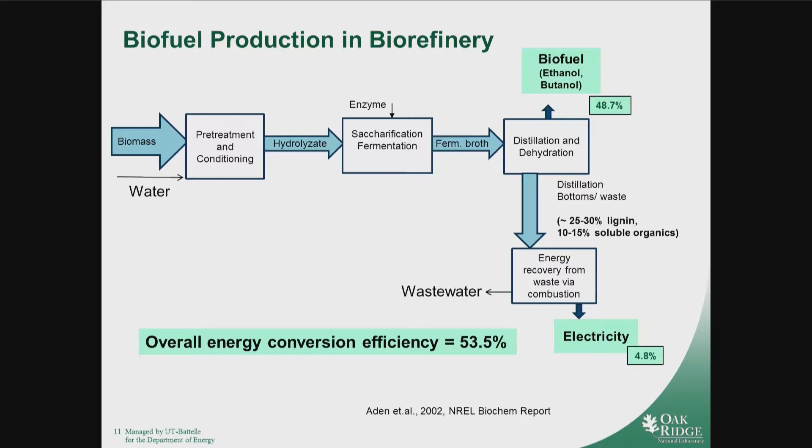So going a little bit deeper into this process in this diagram, which is a little busy, I would like to point your attention to, in addition to the energy efficiency, which results in losses of about 46%, there are also losses of water in this process, primarily due to use of evaporation, boiler technologies, and so on, which result in evaporation and other means of loss of water, which can amount to about 95%.

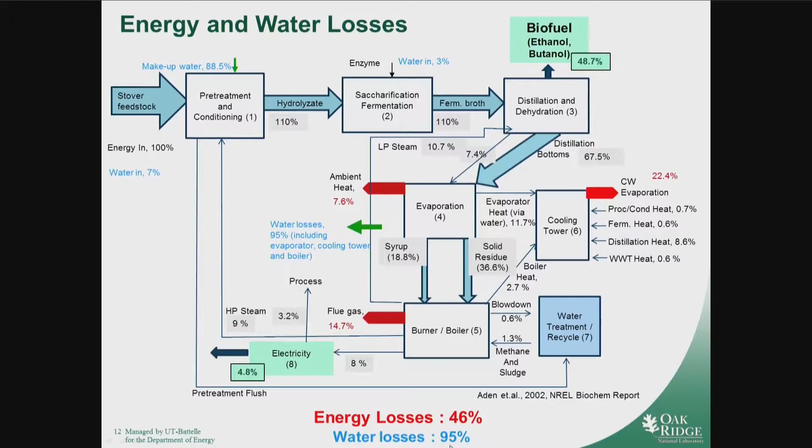So in addition to the losses that I pointed out in this slide, the composition of the wastewater that is generated in the biorefinery is also pretty complex, and it has some components which are inhibitory to the overall process if you have to consider water recycle. During the biorefinery conversion process, in the pretreatment step, the processing of biomass results in production of some molecules such as furfural, hydroxymethyl furfural, lignin degradation products such as phenolics, as well as acetate from the hemicellulose. Some of these molecules are shown here. So the wastewater that is generated in the biorefinery is a complex mixture of these kinds of molecules.

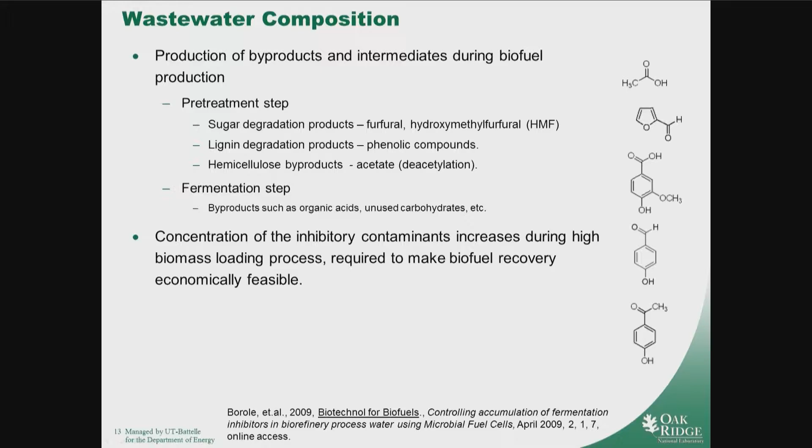Some of these molecules have been known to be inhibitory to the fermentation organisms that are typically used to produce biofuels. When you want to produce biofuels and make that process economic, you have to treat the biomass at high loading conditions, which exacerbates the problem of these inhibitory contaminants, making water recycle almost impossible. So if you look at the treatment cost for the wastewater in the biorefinery, it has been reported recently that it can cost as much as 34 cents per gallon of biofuel produced, which amounts to about 15.8% of the total cost of producing biofuels.

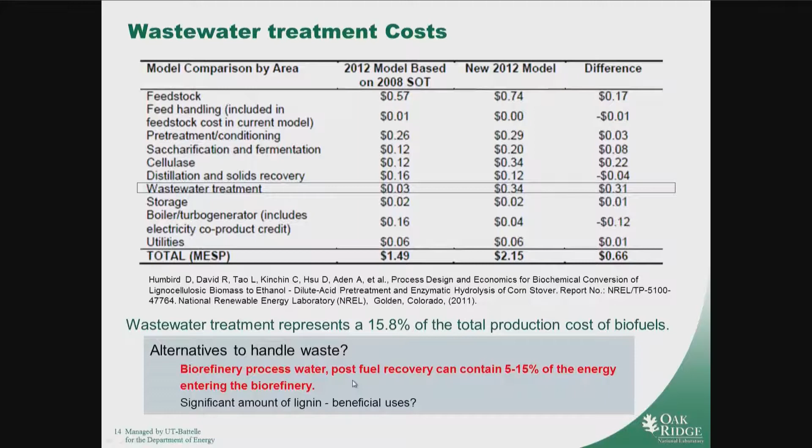So given these problems, we would like to think about what alternatives are available to handle the waste. There are two primary streams. One is the biorefinery process water, which is generated after fuel recovery, which can contain anywhere from 5 to 15% of the original biomass energy that comes into the biorefinery. Secondly, there's also lignin, and instead of burning it to produce just energy, there may be some other beneficial uses. Today's talk is going to primarily focus on the process water and how we can beneficially use this waste.

So I would like to now discuss the microbial electrolysis technology and what advancements ORNL has made in this field, and also then go to discuss the applications and evaluate how we can use this technology in the biorefinery, and then followed by going to the oil and gas industry.

If your goal is to produce electricity, you can use an aerobic cathode which produces water with oxygen, combining with electrons and protons, and which gives you electricity. In case you want to generate hydrogen, you can do that by operating this cathode in a different way, where you apply an additional voltage to generate the hydrogen.

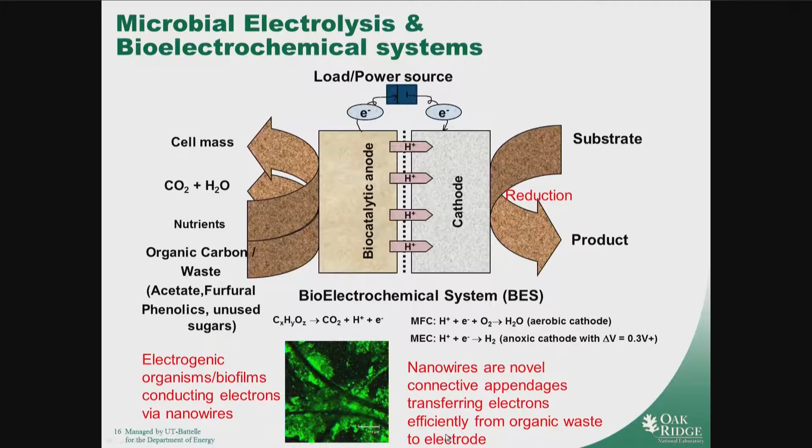In addition to the operation of a bioelectrochemical system as a microbial fuel cell or electrolysis cell, there are a number of other products that can be also generated. For example, in this table, as it is shown, you can produce ethanol, for example, from acetate. You can produce even other chemicals, such as hydrogen peroxide, as well as other biofuels.

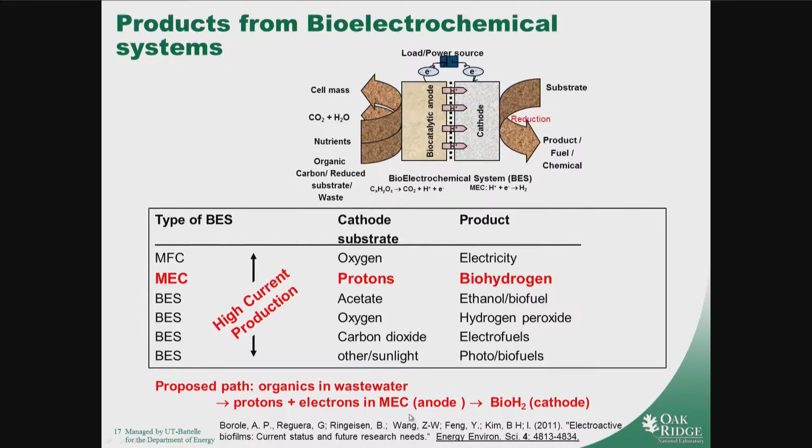Now, in all of these cases, one of the things that is required is an efficient anode, and that requires a high current production. So the proposed path for enabling that is to take the organics in the wastewater to be fed into the anode, which will be then converted to protons and electrons, and that can be converted to hydrogen in a cathode.

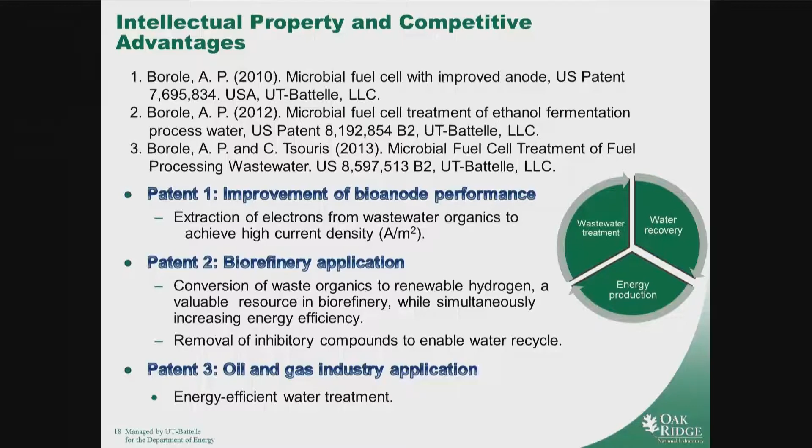So this slide outlines the intellectual property and the competitive advantages the ORNL technology offers. So we have 3 patents. The first one deals with improvement of the bioanode. The second one is on biorefinery application. And the third one is an application in the oil and gas industry. So in case of the bioanode improvement, what has been done is to improve the current density to achieve rates at which you can think about commercializing this technology. So I will discuss how we have done that in the next few slides.

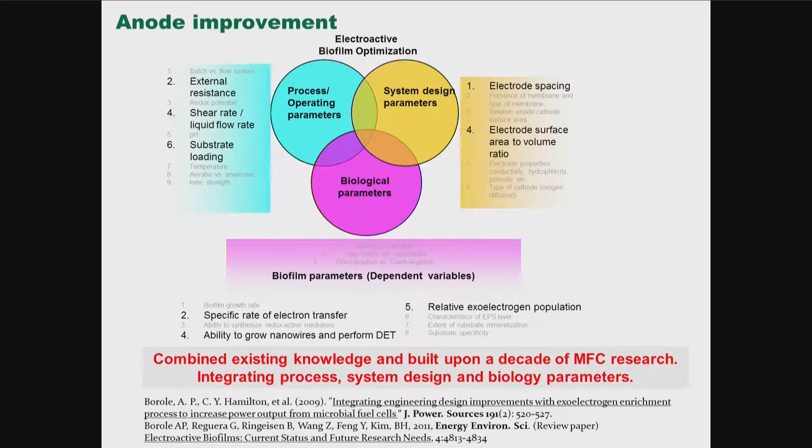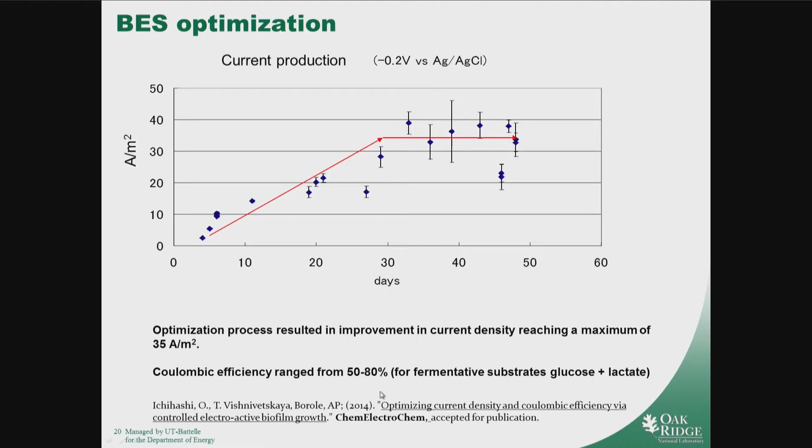So now that we have developed the current densities to a level which are suitable for commercial application, I would like to discuss how this can be used and the variety of applications this is suitable for.

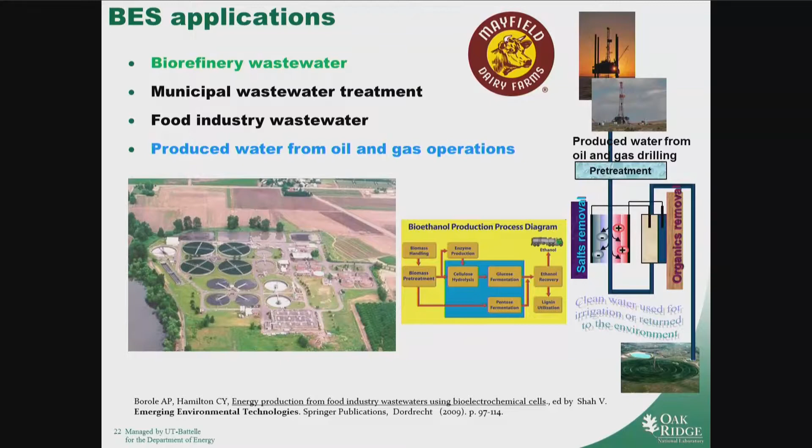The first one will be biorefinery wastewater treatment. In addition to that application, this technology is also suitable for application to treatment of municipal wastewater, food industry wastewater, as well as produced water from the oil and gas industry. So I will be discussing the biorefinery application in detail in the next few slides, and at the end I will touch briefly upon the produced water treatment application.

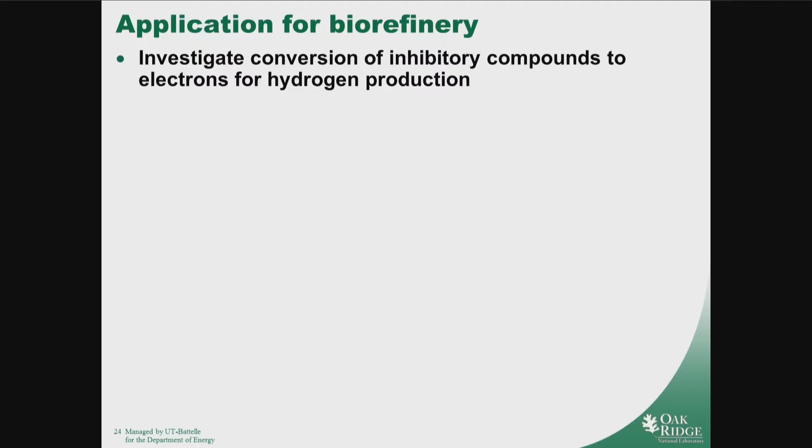So in the biorefinery application, we will look at the conversion efficiency of biomass and how that can be improved. So the main questions to be addressed in the biorefinery include conversion of the inhibitory compounds, as I showed in some of the previous slides, to electrons followed by hydrogen production. Develop a biocatalyst to convert not just a few, but essentially all of the organics, which is a variety of compounds from organic acids to phenolics to furfural, as well as unconverted sugars and organic acids.

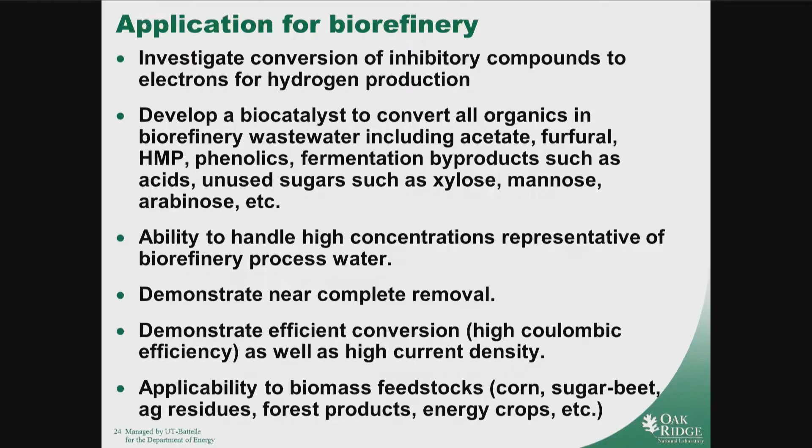It's also necessary to show that the concentrations present in the biorefinery process water can be handled in the microbial bioanode, as well as, to be able to recycle the water, it is necessary to completely remove these molecules and show efficient conversion at high current densities. Lastly, it is important to be able to demonstrate the application with real feedstocks.

So we're going to start with a real feedstock, and in this case we used a corn stover to ethanol conversion process. And we used the sample that was generated from pretreatment of corn stover followed by hydrolysis and fermentation, and we generated the biorefinery process water, which was then studied for conversion to electricity and hydrogen in a bioelectrochemical system.

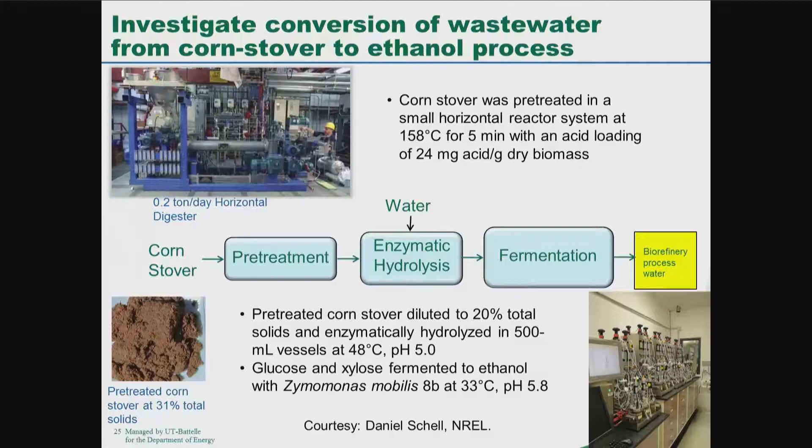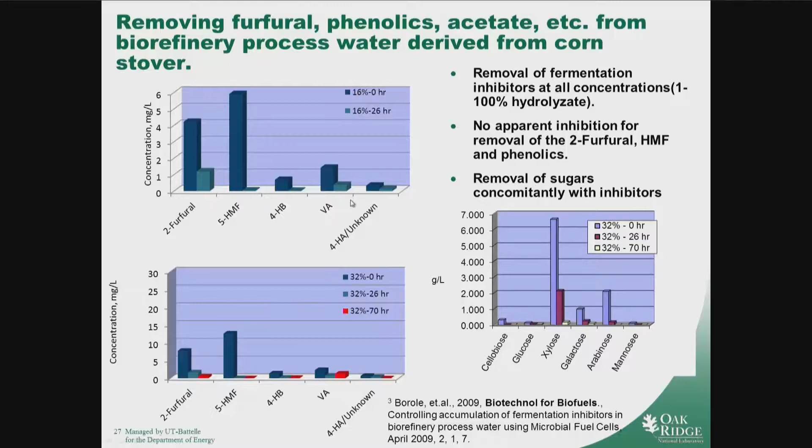Now, going from model substrates to real wastewater, we used, as I showed in the earlier slide, the process water that was derived from corn stover, and we demonstrated conversion of furfural, phenolics, acetate, and other compounds almost to negligible, undetectable concentrations in a period of 24 to 48 hours. When we go to application of this in the biorefinery, typically it would be a continuous operation. So we have done experiments to demonstrate that under continuous flow conditions also you can do this process and be able to generate high current densities.

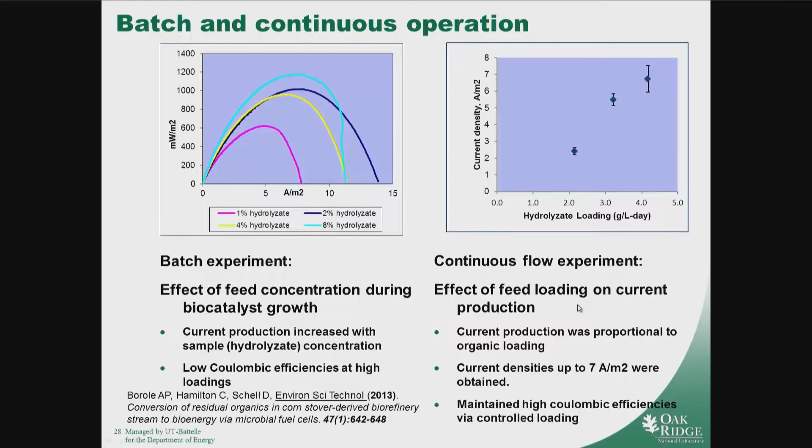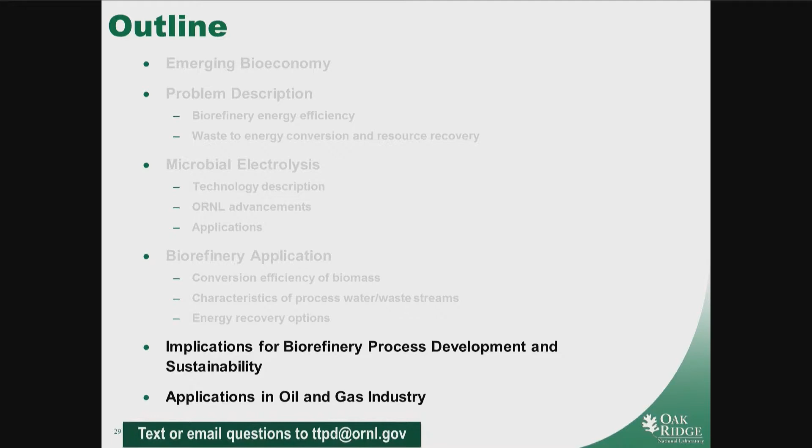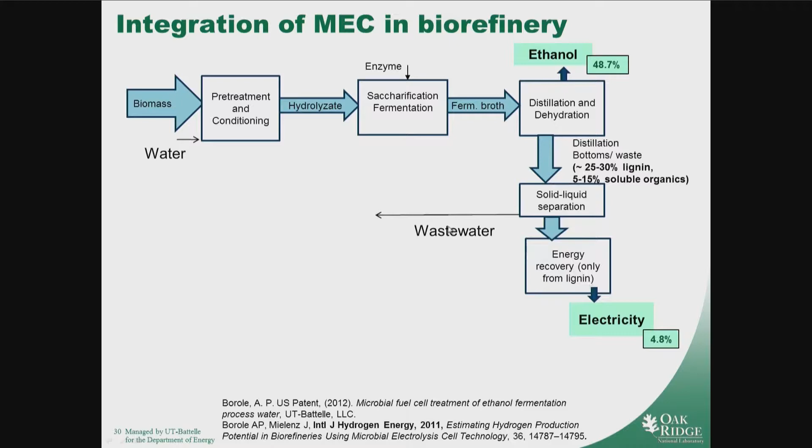So having demonstrated in the laboratory that this can be done, I would like to discuss what are the implications of this for the biorefinery. As we started with this diagram, which was integration of MEC into the biorefinery, I would like to demonstrate where actually is the point of application for microbial electrolysis cells in the biorefinery process flow diagram. So the wastewater that is generated after fuel separation contains lignin as well as soluble organics. So we would include a solid liquid separation step to separate the wastewater and potentially find other uses for the lignin. The wastewater can then be fed into a microbial electrolysis cell to produce hydrogen or a fuel cell to produce electricity.

We have done some estimates to figure out how much electricity or hydrogen can be produced in this particular scenario. So our calculations show that you can generate up to 2.5 megawatts in a full-scale biorefinery producing about 70 million gallons of ethanol per year. Alternately, if the system is operated as a microbial electrolysis cell, you can generate up to 7,000 cubic meters per hour of hydrogen. The energy produced is potentially sufficient to meet about 25% of the power needs of a biorefinery.

So this has the added advantage of potentially reducing use of external electricity or fossil fuels, as well as producing a valuable product such as hydrogen, which can be used in the biorefinery. Now, this flow sheet that we have been discussing primarily focuses on production of ethanol as the product.

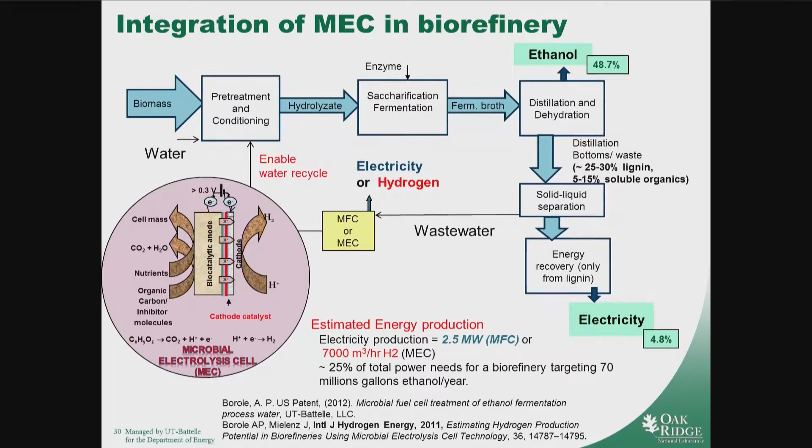The future biorefineries are going to have a complex combination of the most efficient ways of producing products starting with biomass. So I would like to consider a few mature biorefinery scenarios. There was a scheme provided in some work done by Lee Lynd's group on production of various fuels and energy products from biomass.

In this case, as you can see, the biomass is pre-treated with ammonia, followed by a fermentation process to make ethanol. The solid residue, which primarily contains lignin, was then gasified to produce a syngas and ultimately hydrogen to be fed to a Fischer-Tropsch synthesis to make hydrocarbon type products. In order to do this, you require hydrogen.

That hydrogen was generated from the waste stream through an anaerobic digester process, followed by partial oxidation and cleaning steps to make the hydrogen available for Fischer-Tropsch. This kind of scheme was modeled by Laser et al., and they demonstrated the overall process efficiency to be about 70.4%. So this shows you that it is possible to go from 53.5% for just ethanol production to as much as 70%.

So we would like to consider this kind of advanced biorefinery scenario and see what role microbial electrolysis can play in such a scheme. As I mentioned, there is a need for hydrogen for making fuels. And so the microbial electrolysis process fits in quite well; it can be used to treat the wastewater and produce hydrogen directly, which can be fed into the Fischer-Tropsch synthesis process.

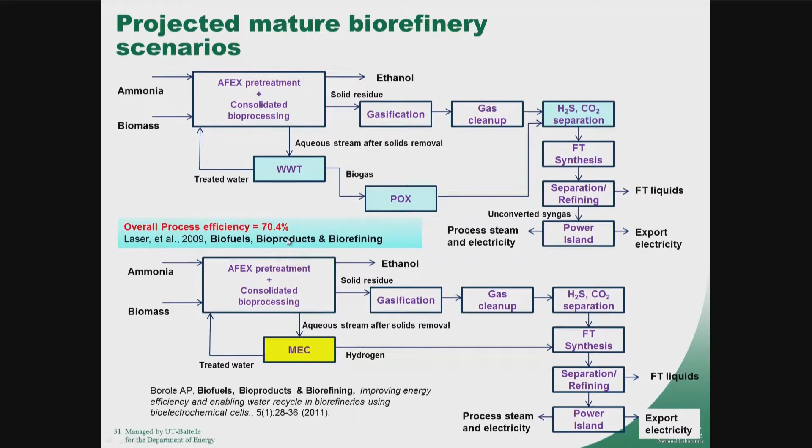Now, this eliminates the need for an anaerobic digester or partial oxidation and maybe even cleanup steps. So this has potential to reduce the capital cost for the process, while at the same time achieving high conversion efficiencies of about 70%.

Now, this is a relatively new technology, and there are several challenges. We have demonstrated that at the lab scale, we can achieve the current densities required for commercial consideration. The next step is to see if this can be done at larger scale.

And so the future directions that we are planning to pursue include understanding the scale-up process, using electrochemical methods to understand the effect of different process parameters on scale-up, and demonstrating the ability to produce hydrogen at a current density of 20 amps or higher per square meter, required for commercial consideration.

Ultimately, what matters in the biorefinery is to be able to meet the goals set up by EPA to meet the renewable fuel standards. So there is a need to demonstrate generation of 16 billion gallons of advanced biofuels or drop-in fuels by 2022, and this hinges on a main requirement for reduction in greenhouse gas emissions by 50% or more.

This can be made possible by utilizing methods which are able to produce more energy from the biomass, as well as reduce some of the treatment cost for wastewater. There is potential to reduce these from 34 cents per gallon to lower.

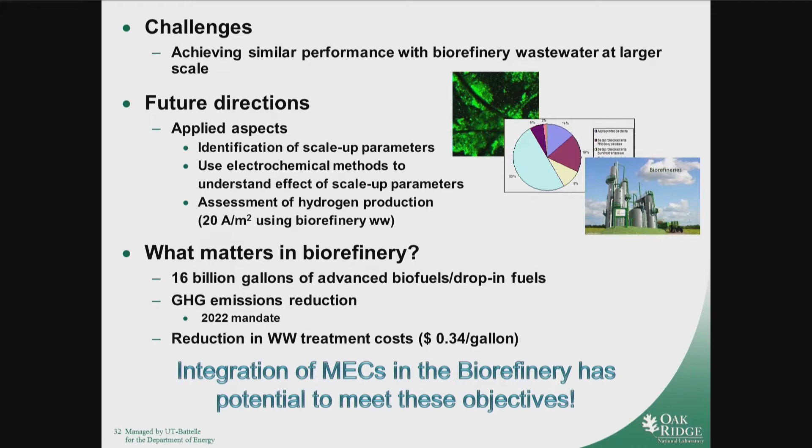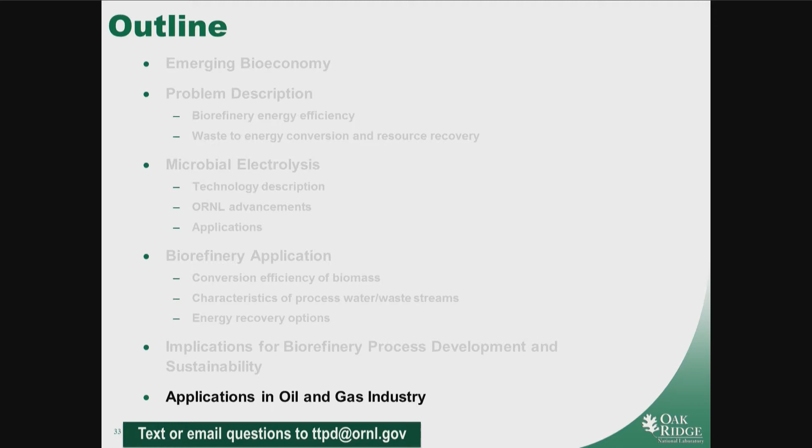So with that, I would like to move on to a last application, a couple of slides with focus on the oil and gas industry. As you all know, there has been a big boom in gas production in the US, and this has been made possible by the process called fracking or hydraulic fracturing.

However, hydraulic fracturing also results in production of a significant amount of wastewater. This is because large amounts of water are required to be pumped to recover the oil and gas. So the issues related to the water produced from this process revolve around high organic concentrations, or high BOD, primarily in the flowback water resulting from fracking, and high concentrations of salts present in the produced water as well as flowback water.

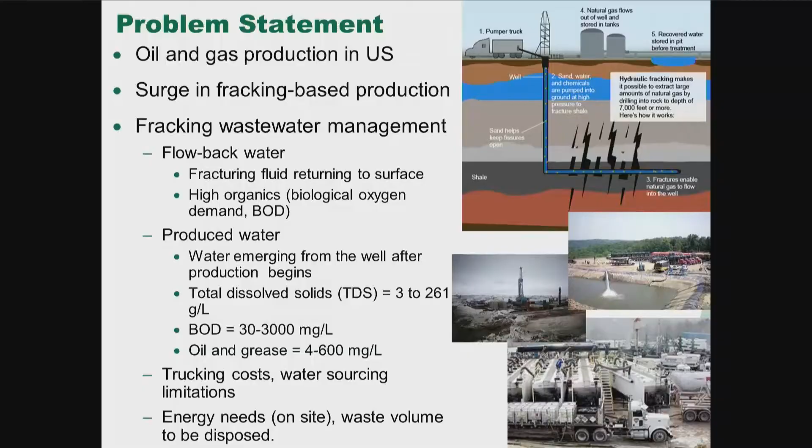Currently, there is a lot of involvement of trucking and shipping of the wastewater from these remote sites to water treatment centers, and this costs quite a bit, on the order of about $2 to $15 per barrel of wastewater. Additionally, there is a significant energy need in some of the processes that are used to treat the waste on site. So we're considering how the microbial electrolysis cells can be employed in this particular scenario.

So our goal in the development of this particular technology is to demonstrate a synergistic conversion of the organic contaminants into energy and using that energy to remove the salts. This has been done by using a combination of two unit operations. One is called capacitive deionization to remove the salts, and microbial fuel cells or electrolysis cells to convert the organic waste into energy, which is then used to run the capacitive deionization.

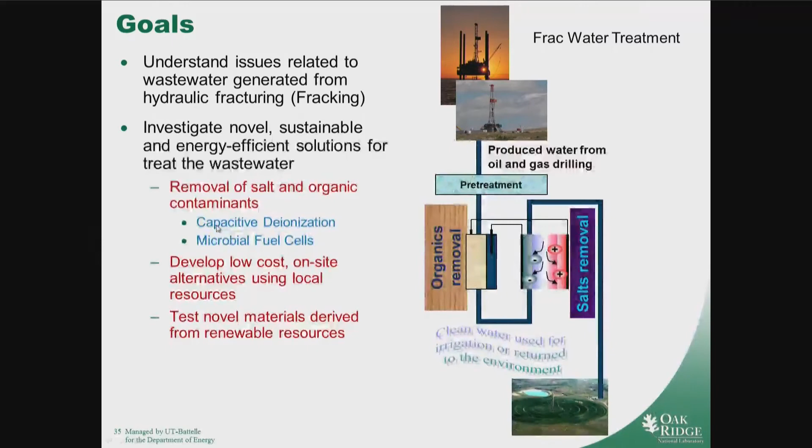So we have demonstrated the ability to generate energy from some of the organic waste that is present in the fracking wastewater or the produced water in the presence of high salt concentrations. Now this can be integrated with capacitive deionization or a salt removal process as shown in this particular diagram. And it is possible to remove at least some part of the salt using the energy produced by microbial fuel cells.

However, the ability to generate electricity from waste offers another option to run these electrosorption or capacitive deionization systems by using waste from local sites. And so it may be able to reduce the cost of wastewater treatment as well as the energy intensive nature of desalination.